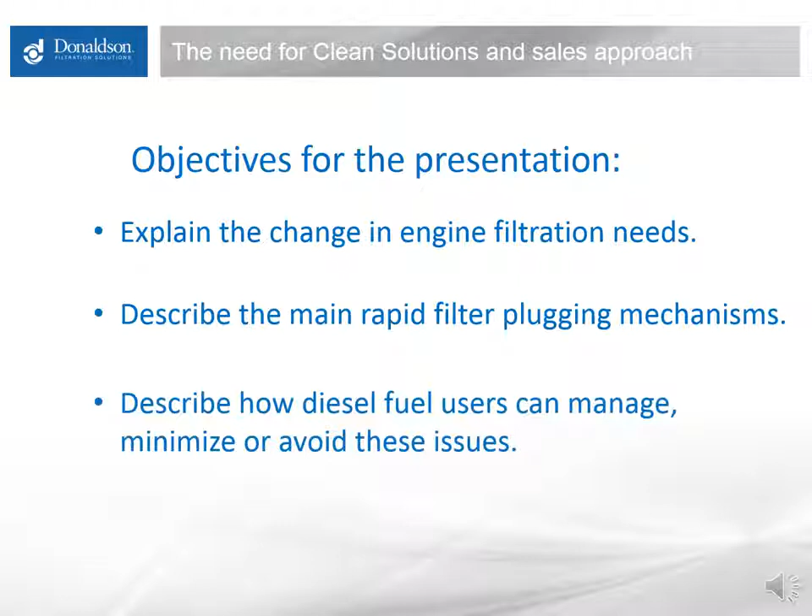The crux of the issue with rapid filter plugging being more common now than it was in the past has to do with engine technology development, specifically the fuel injection system.

The modern high-pressure common rail injector system, to meet new emissions requirements, has a much different tolerance. You see a schematic here of a fuel injector, with an area highlighted where fuel flow is controlled in the engine and returned back to the fuel tank.

There's a segment in there that has a valve under extreme pressure on one side, about 25 to 45,000 psi, and that valve controls fuel that either gets injected into the cylinder or returned back to tank. There's an excess of pressurized fuel to ensure a proper dose of fuel goes into the cylinder each time this injector opens up, and typically on a new engine it's opening about 5 times per cycle.

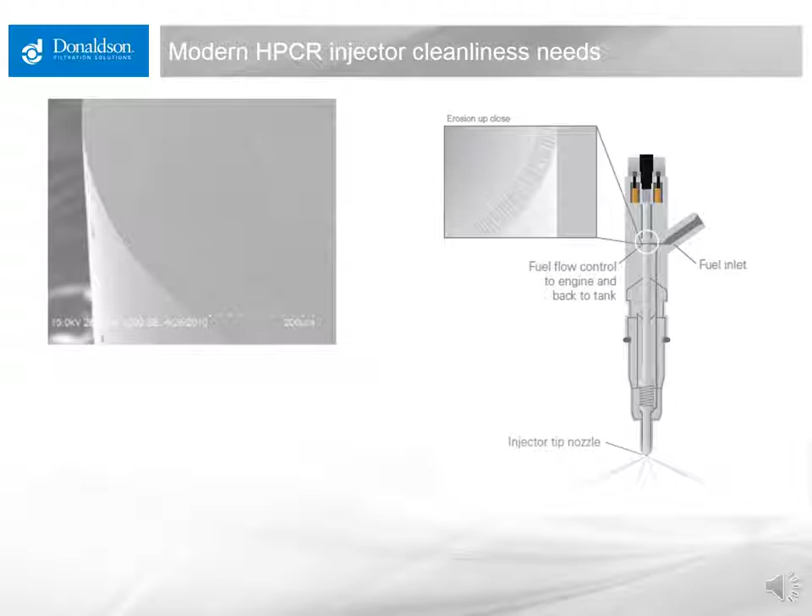So there's a lot of activity going on there, and that valve opens and closes very quickly, only very slightly. In an open position, there's a 2 to 3 micron clearance between the two surfaces of the valve. If any particulate gets between the two surfaces of that valve when it's opening and closing, it begins to impact the seal surface and causes dimpling and eventually erosion.

Off to the left here you can see an as-new surface of that valve, and a valve that has seen impacts from very, very fine particulate, with erosion developed across there, causing leakage across that valve. If flow leakage through that valve increases up roughly 1.5%, the injector will need to be serviced or replaced at great cost in a modern engine.

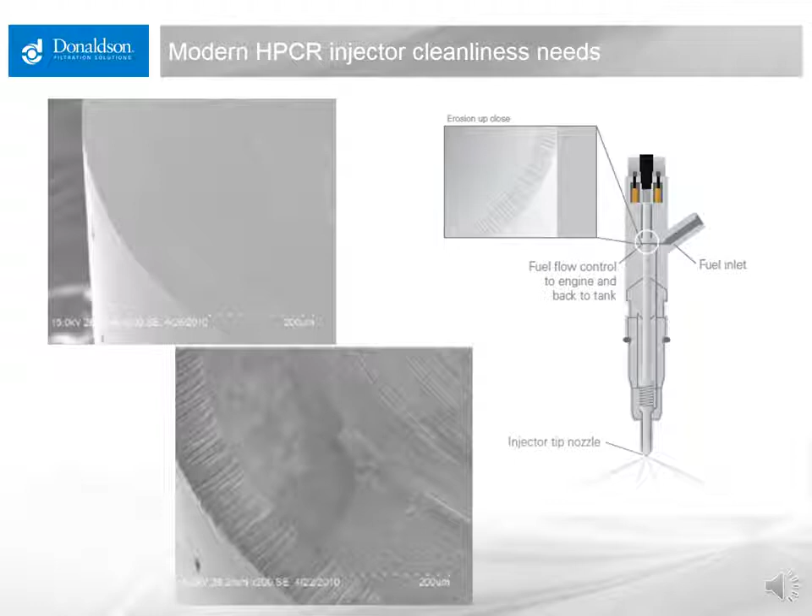So to get a better idea of what it means to go from a tolerance of particulate 7 to 10 microns and larger, to now something about 2 to 3 microns and larger, I have depicted here a range of particles, a representation of particles in fuel.

Fuel tends to carry very small particles. Anything visible will quickly settle to the bottom of a fuel sample or the bottom of a tank. It tends to carry a lot of very fine particles because it's thin and the large stuff settles out. The largest particles, or the smallest particles you can see, are 40 microns and larger. So we're discussing particles much smaller than you can see with the eye. Unless they're at a very high concentration in the fuel, you won't see any difference, whether it's as dirty as it can be or very, very clean. It will look almost identical.

So here I have depicted a representation of the distribution of about 1,000 particles in fuel. There are just a couple of 14 micron and larger particles out of that 1,000. There's maybe 20 or so in the range of 6 to 14 microns and larger. There's about another 30 or so in the 4 to 6 micron and larger size range, totaling about 50 of the 1,000 particles that are 4 microns and larger.

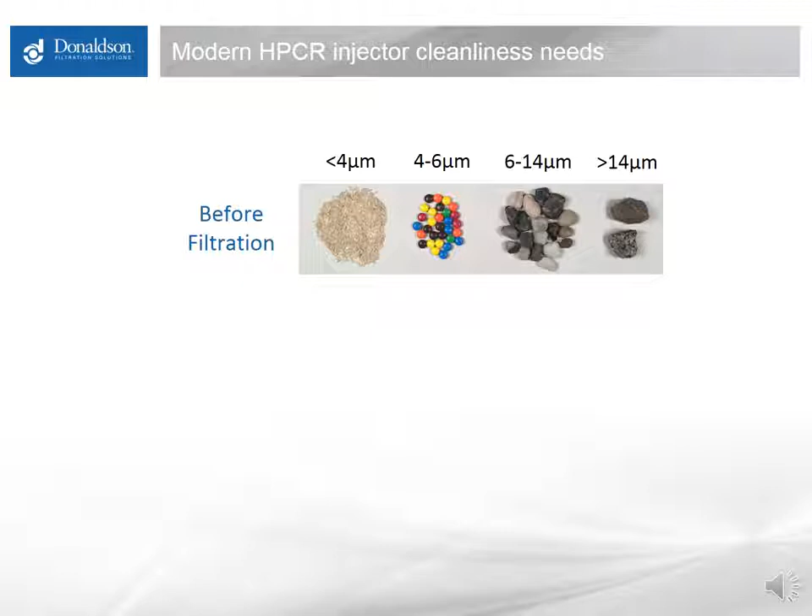That means 950 of the particles are below that 4 micron size, in that 2 to 3 micron size range. So if you have an older dispenser filter or an older primary filter on an engine, it's doing a little bit of filtration, but it really isn't doing much.

It's removing a couple of large particles here and there and maybe a few of the 6 to 14 micron particles, but doing very little else to the vast majority of the particles in the fuel. Those filters tend to last a very long time. Never see them plugging up. You'll see those kind of filters on dispensers and they will last for years and years and never load up because they really aren't removing much in the way of particulate.

An older secondary filter, or maybe an older higher efficiency dispenser filter, was perhaps a 10 micron nominal filter, and that does a little bit better job. It's removing the 14 micron and larger particles, two-thirds of the 6 to 14 micron particles, maybe half of the 4 to 6 micron particles, and maybe it's starting to grab some of those 4 micron and smaller particles, but not very many. Those filters also tend to last a long time, but they do plug a little bit quicker than a 25.

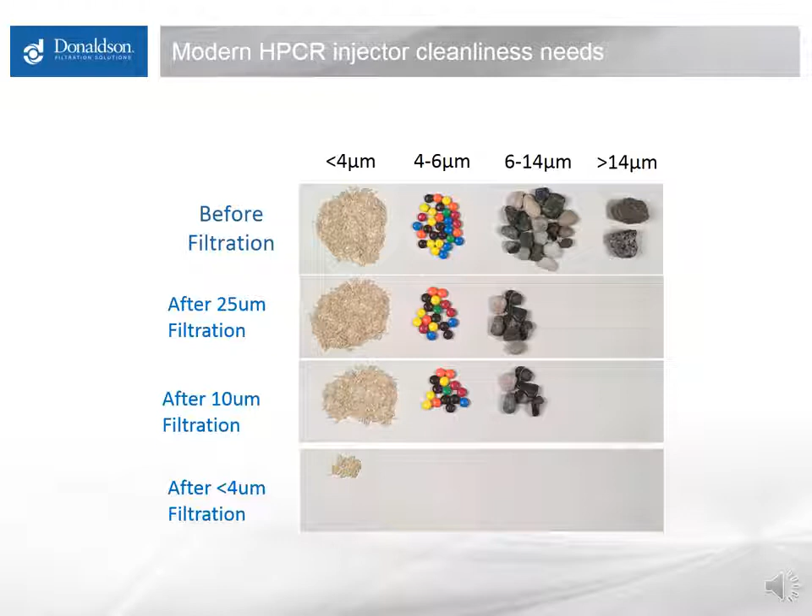Then we come to the needs of the new modern high pressure common rail engine, and the change in requirement of filtration is dramatic. You need to address almost all of those sub 4 micron particles because they are the ones that can do the damage in that modern high pressure common rail injection system. So the job got much bigger. Instead of removing 50 or so of the particles out of 1,000 in a normal fuel supply with an older filter system, you need to remove almost all of those 1,000 particles to maintain proper operation of an injection system. So that change on the filter can from a 10 micron to a less than 4 micron may not seem like much, but that's a huge change in the job a filter must do.

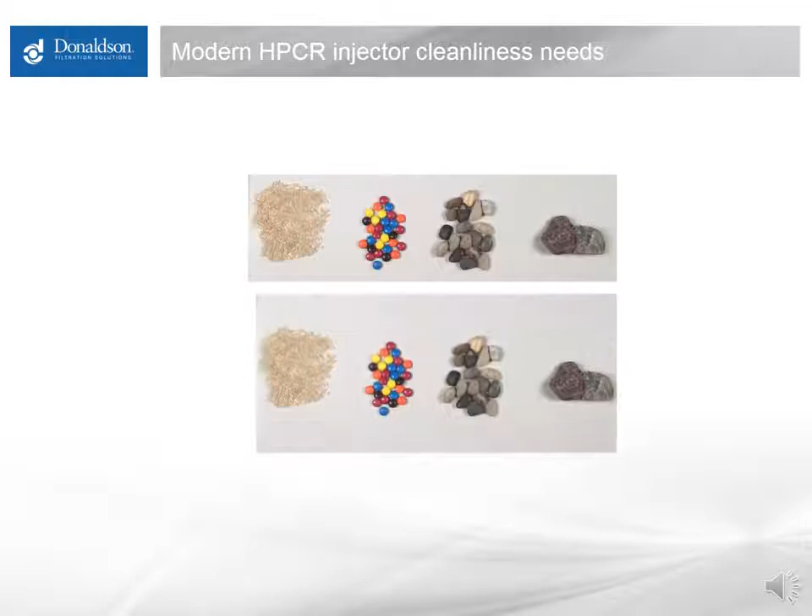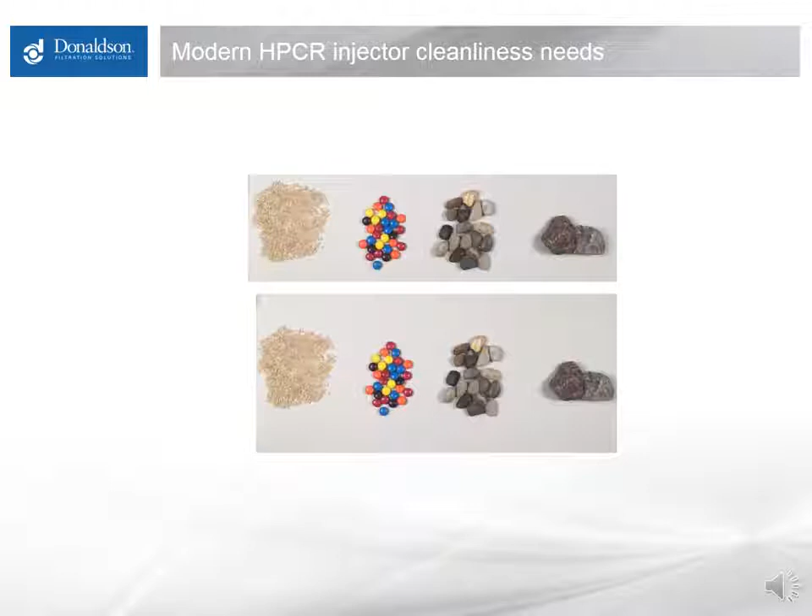Another thing to consider is how much dirt is coming to the filter and what does it look like. If you get a batch of fuel that has a batch of particles in it, represented here by this depiction of 1,000 particles, and you get another load of fuel with its own load of particulate, that's fine. But if you experience a rapid plugging, say you changed your filter and 8 hours later it's plugged, or things were going along fine and all of a sudden the equipment stops very quickly, it's not an increase in more of the same distribution of dirt.

Almost always, it's a massive increase in sub 4 micron particulate, and generally these are associated with chemistry issues or a temperature related issue causing a huge increase in that very small particulate. The rest of the particle distribution is still about the same, but you have this enormous change in small particles, which will plug a modern filter, but they don't really bother an older or coarser filter, so they aren't removed there.

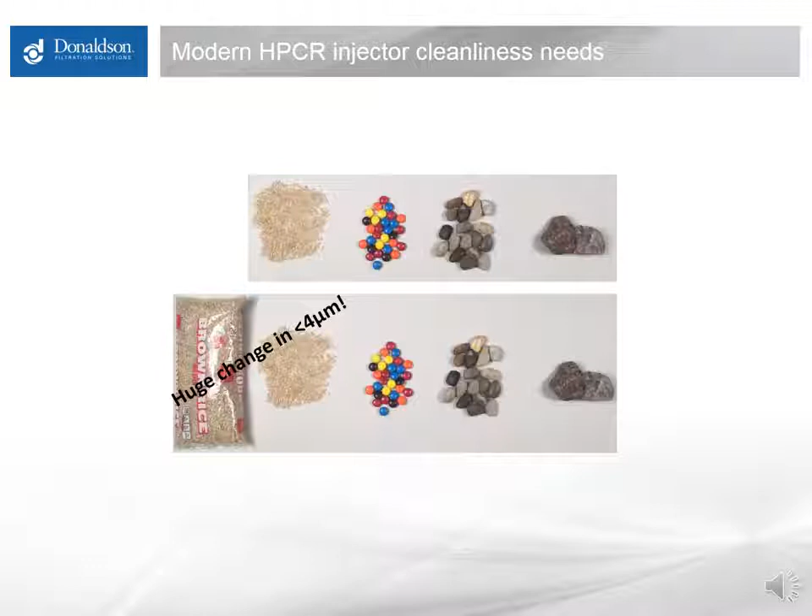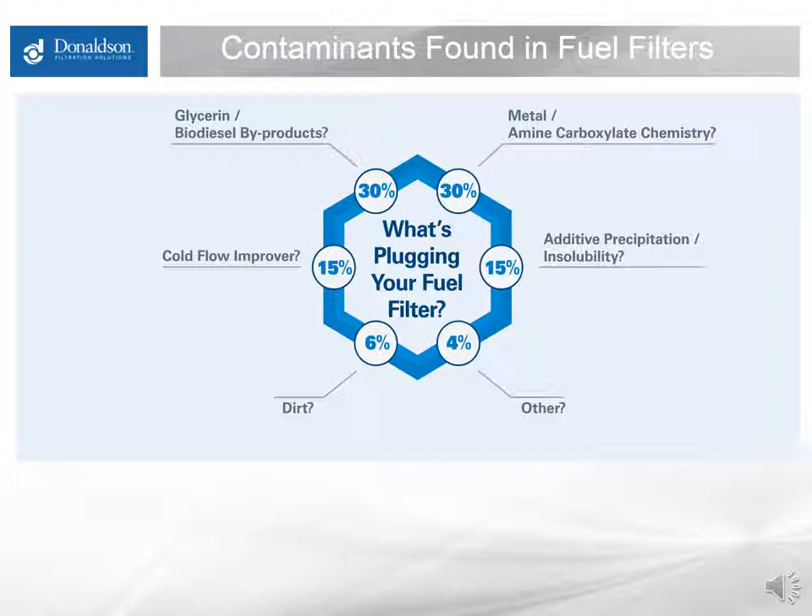First, I'd like to touch on one other aspect of fuel particulate that is actually defined in the specifications. The only true description of fuel generating solids in the fuel standards is in regards to gelling or waxing of fuel. That has to do with the temperature and the safe operability of the fuel staying liquid at a temperature. It's called the cloud point in general. The cloud point is the point at which the fuel begins to form solids that make the fuel look cloudy to the naked eye.

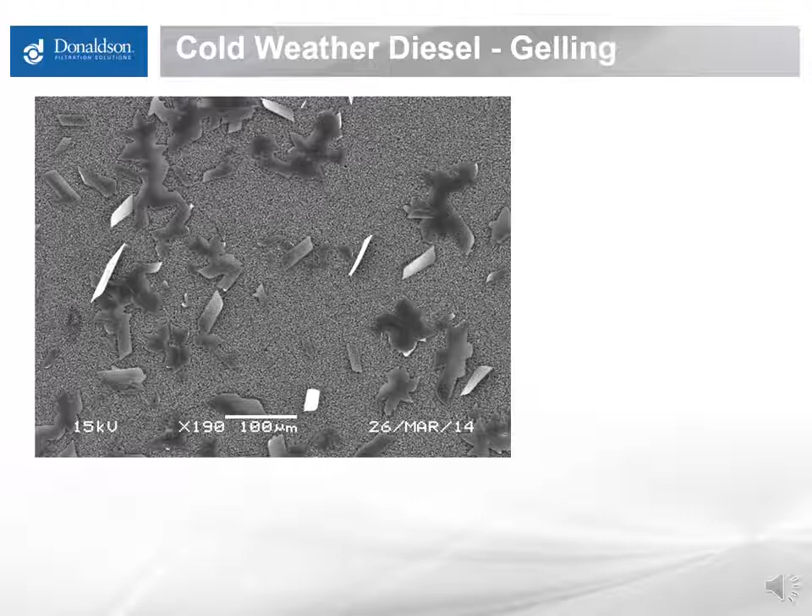A few degrees above that, things are starting to come out of solution, but they haven't grown to a size where they start to be visible. You can see here some wax particulate generated in fuel. Traditional high sulfur fuel in the old days, and straight hydrocarbon fuel, can generate flat sheets of wax similar to these, roughly 100 microns in size, and they will load on filters very quickly. A large portion of the fuel compared to the amount of actual dirt in the system will turn into solids due to gelling, and it will overload the filters and plug things very quickly.

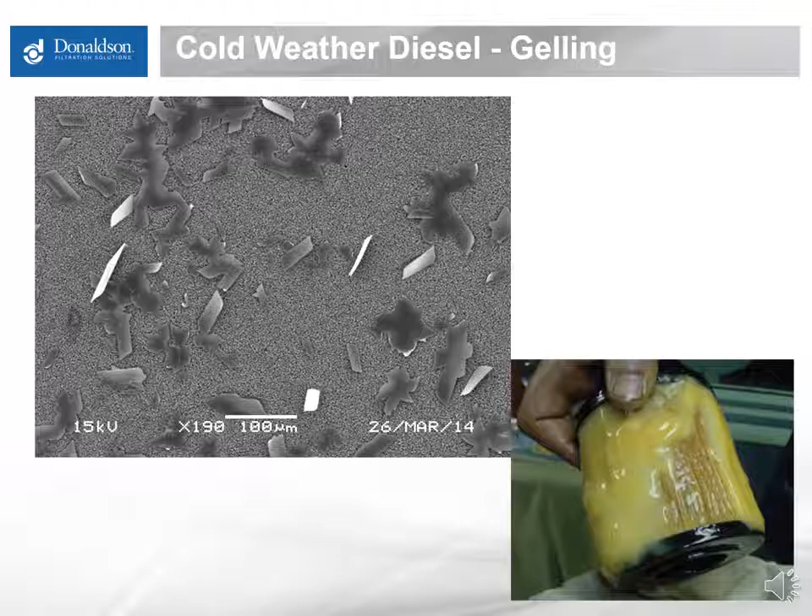If you run that fuel or keep that fuel at a temperature above its cloud point, that should be a very minimal issue, but it is a critical parameter to keep in mind when purchasing or using fuel. Know what temperature the fuel will stay liquid at, and make sure your minimum expected operating temperature is above the cloud point by at least several degrees, or you're likely to run into this issue in cold conditions at times.

The first solids formation that isn't really described in standards, which causes probably the most frequent unexpected filter plugging issues seen in the field, has to do with the use of biodiesel blends and what we refer to as glycerin fallout. Glycerin is a trace contaminant left in the biodiesel when it is manufactured. Most of it is scrubbed out, but there are a couple hundred ppm of glycerin in there, compared to actual dirt which is at about 1 ppm concentration. Even when you blend this biodiesel at different percentages, 5, 10, or 20%, there's still enough glycerin in there that in certain conditions, some of it can fall out and make particulate.

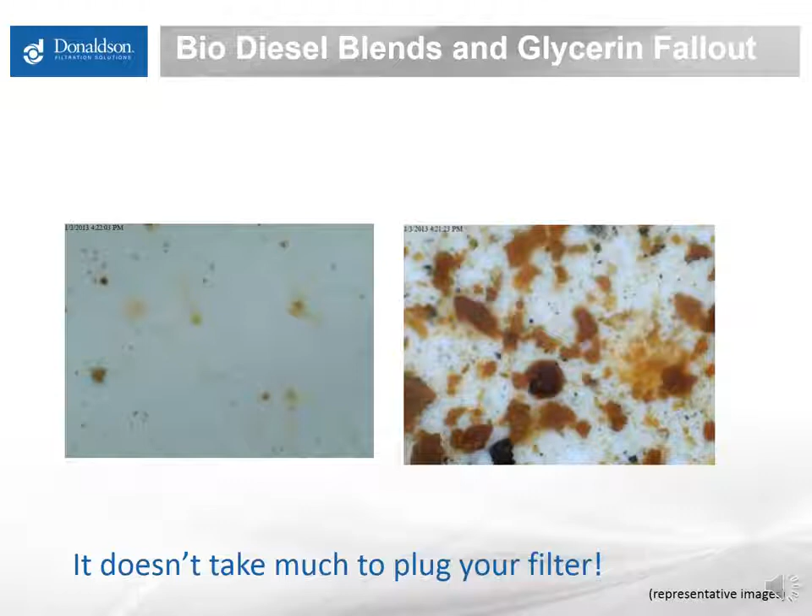As I mentioned, it's usually in the fuel at a concentration much higher than the actual dirt. The conditions that lead to it coming out of solution are decreasing temperature and an increase in moisture content in the fuel, which will lead to dropout and formation of solids that can plug filters.

Certainly don't expect to see cases this severe, but they do occur occasionally. Solutions for this are to keep the fuel as warm as you can, and keep moisture out of it. The 2 things fighting against you are cooling conditions and water. So keep your tanks clean, and if at all possible, only use biodiesel in warmer conditions to avoid the temperature issue and dropping out of solids.

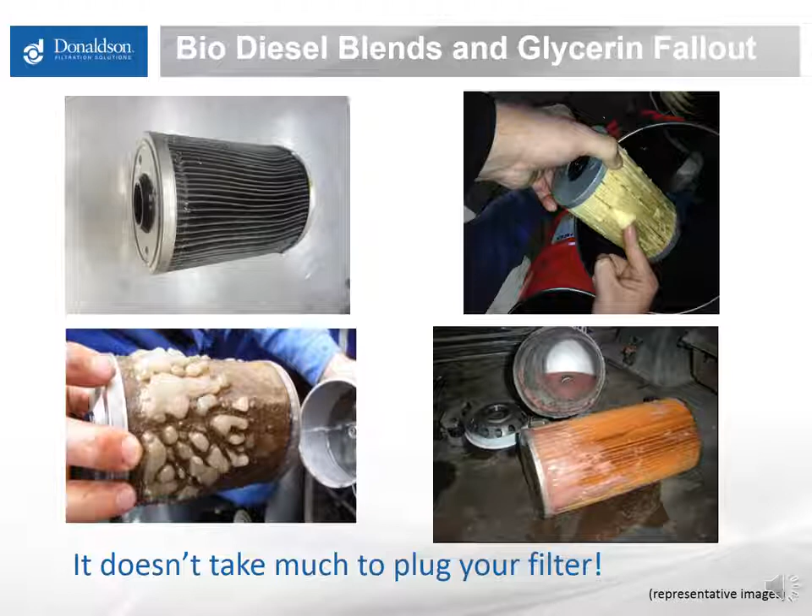That may be the case in certain parts of the country. In northern North America and Canada, biodiesel is not used, but there are states that mandate its use year-round, and there's more frequent use of biodiesel in the southern part of the United States year-round as well. So if a cold snap comes through, you can have conditions likely to cause glycerin plugging. This is probably the most frequent method of filter plugging encountered in the field.

The next most common issue we see in the field is something called metal carboxylates. They're a long-known contaminant in fuel, traditionally contributing to injector deposits in older series engines with coarser filters. Very fine particulate passes through older filters and continues downstream, but with a modern high-pressure common rail engine, secondary filter, or high-efficiency bulk filter, it will load in that filter.

These are not typically generated at end customer sites. This material can be found well upstream, all the way to the refinery, and the likely contributors to its formation are present in the final steps of finishing fuel there. It needs water to be present, some salt present, and the carboxylate portion is a common chemistry put in fuel as a corrosion inhibitor. So you have corrosion inhibitor, salt from the final salt bed filtration to remove water, and some caustic usually used late in fuel manufacture. All of those contribute to carboxylate formation.

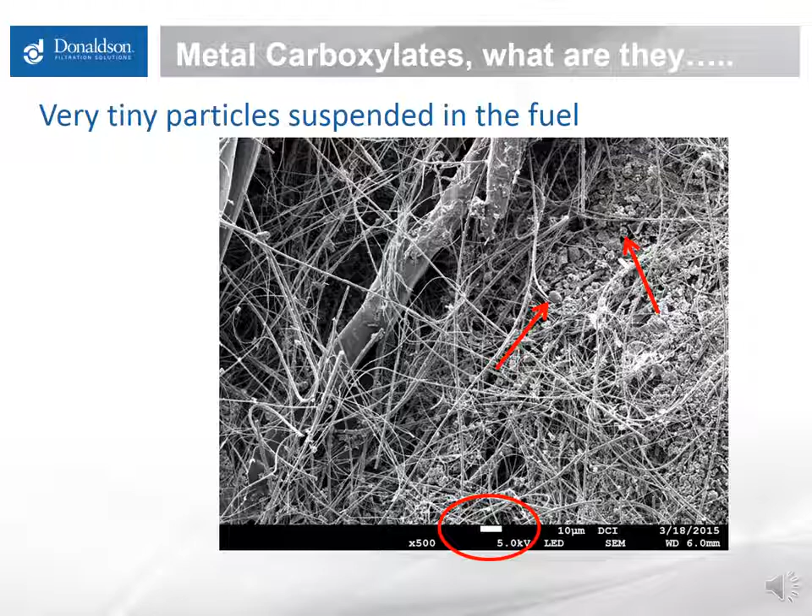A somewhat related chemistry issue that may be confused in certain analysis with metal carboxylates is something called amine carboxylates. This reaction occurs from the same corrosion inhibitor typical in fuel, there to prevent damage to pipes and pumps, but it's a reaction between that corrosion inhibitor, water, and some amine chemistry common in cold flow improver packages, specifically premium cold flow improver packages. That can form a whole bunch of small solids that will load in filters.

This is associated with cold flow improver materials used only seasonally, so it's occurring generally further downstream - not coming from the refinery. Cold flow improver is usually blended either when the tanker truck is being filled up for delivery, or potentially at the end customer site. If this reaction is occurring, a way to avoid it is to stop using the cold flow improver and perhaps blend some more number 1 to lower your cloud point naturally, at least to experiment and see if this is the cause of unexpected rapid plugging. Again, this is a seasonal one - you can't address it on fuel coming to you unless you're pre-filtering, and it may be created at the end customer site.

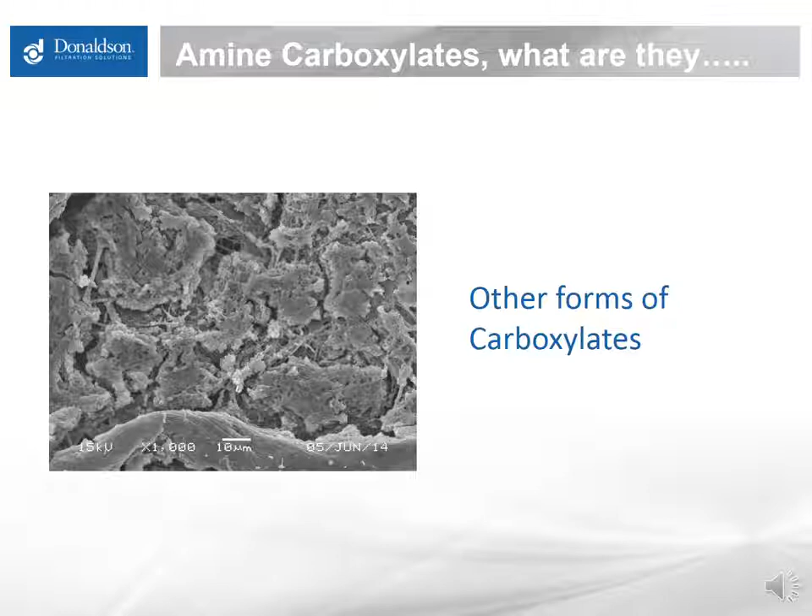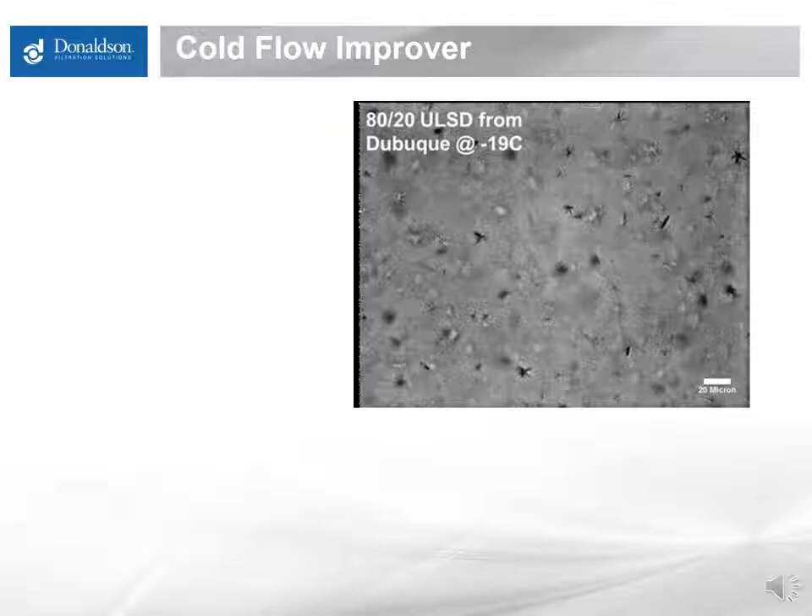The cold flow improver changes the shape of particulate formation. It does not change the temperature at which the fuel begins to generate particulate, or the amount of particulate it generates. It generates a different size particulate. In this case, there's a 20 micron scale bar on that image, and you can see these are less than 20 micron particles, which will help the fuel flow through screens and pump down pipes.

But it's still going to load on most filters used in primary and secondary positions, or even relatively efficient bulk dispensing filters. It's still forming a solid, just a different shape and size, and it's likely to overwhelm filters and plug them quickly. The most robust solution is to blend more number 1 diesel fuel, naturally lowering the cloud point so that when operating in cold conditions, the fuel remains entirely liquid.

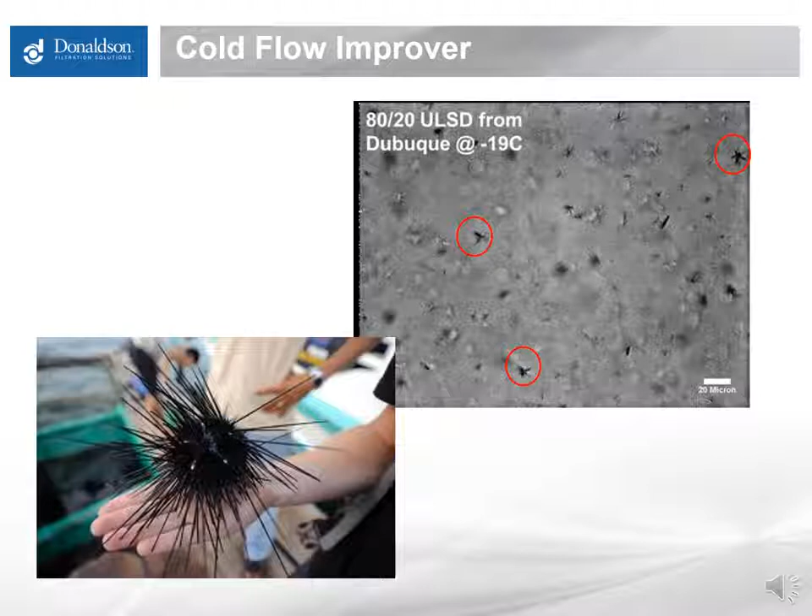One additional point—and there's a webinar on this, as with all these topics, we have more extensive detailed webinars. Cold flow improver dosed in at the end use point can lead to additional particulate formation above the natural cloud point of the fuel. If fuel already has cold flow improver in it and you add more, it begins forming particulate at a higher and higher temperature. So always follow the dosing instructions, and be certain whether the fuel you're dosing already contains cold flow improver.

It's also worth noting that cold flow improver must be put in warm fuel. It cannot be put in fuel that's below about 55 degrees Fahrenheit—it needs to be blended warm to function properly. There are some hazards associated with that, and you must read the instructions to prevent further plugging instead of solving the problem.

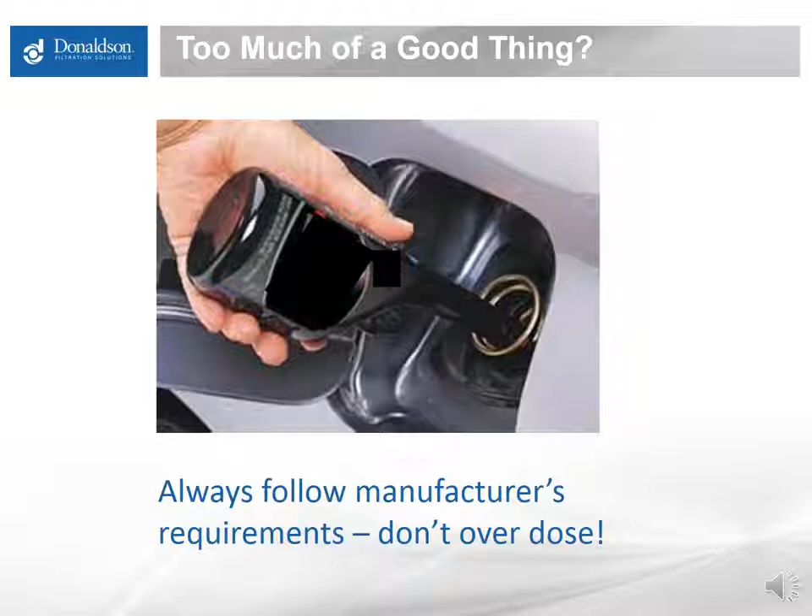I've touched a couple of times on how water contributes to solids formation, both with glycerin and some of the other additive reactions that create solids. So we don't recommend letting water build up—you should do your best to prevent that, and there are things you can do: routine tank cleaning, using desiccant breathers, or even purging the reservoir headspace with dry air to prevent condensation from building up. We have a couple of webinars on that on our website, My Clean Diesel, if you have concerns.

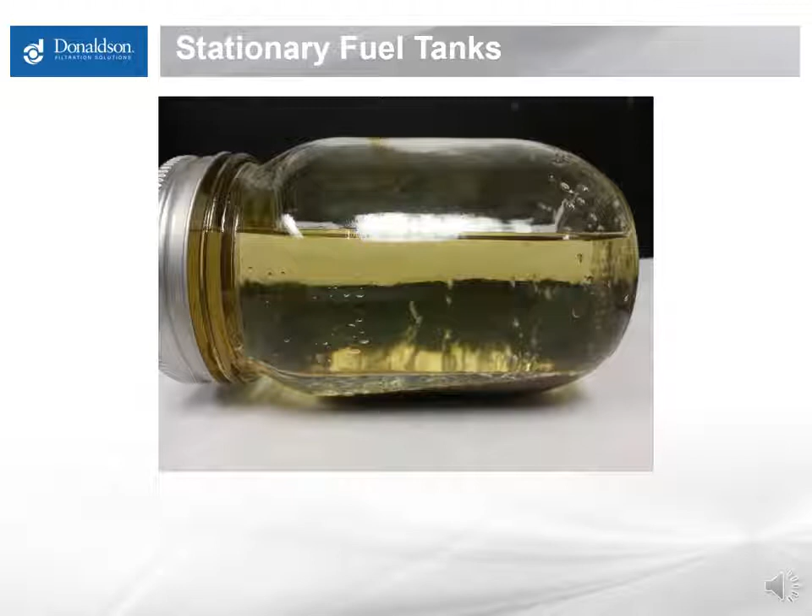And then dirt, which can build up in the bottom of the tank, should also be kept at a minimum to avoid certain issues. Again, gravity is doing its job settling things out over time, but if you dispense new fuel into that tank and stir things up—or worse, move the tank around...

If this is a mobile fueling trailer, a pickup bed tank, or a mobile vehicle, and you're not keeping that tank very clean and dry, as you bump it around you stir things up. It's possible with a mobile fueling system to dispense far poorer quality fuel out of the nozzle than what you put into the system, because as you take it down the trail, road, or across the job site, you agitate it, shake it up into a milkshake, and dispense it into a piece of equipment.

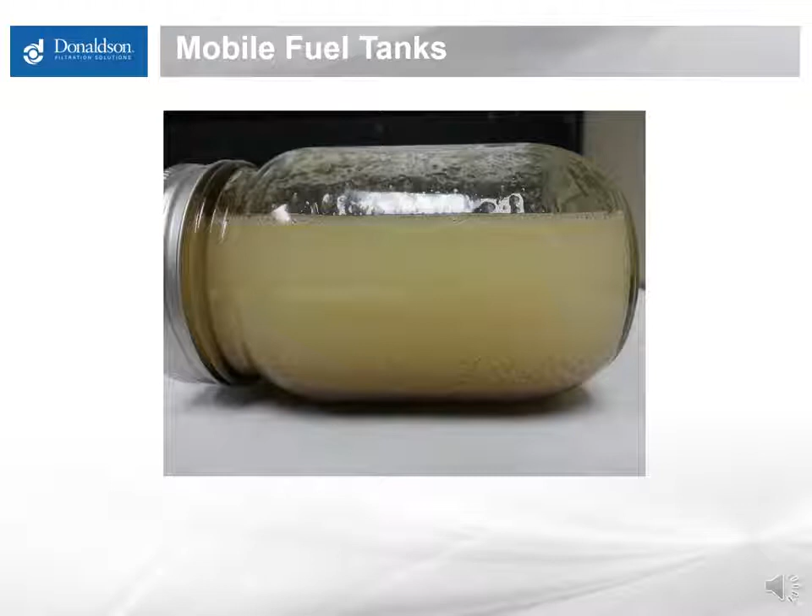That needs to be considered. The equipment needs to be kept very clean, or you're likely to dispense high concentrations of dirt and get rapid plugging as a result. It's just not a good situation to move dirty fuel around—you'll stir it up and create very unhappy situations with soft solids and hard particles causing a lot of grief.

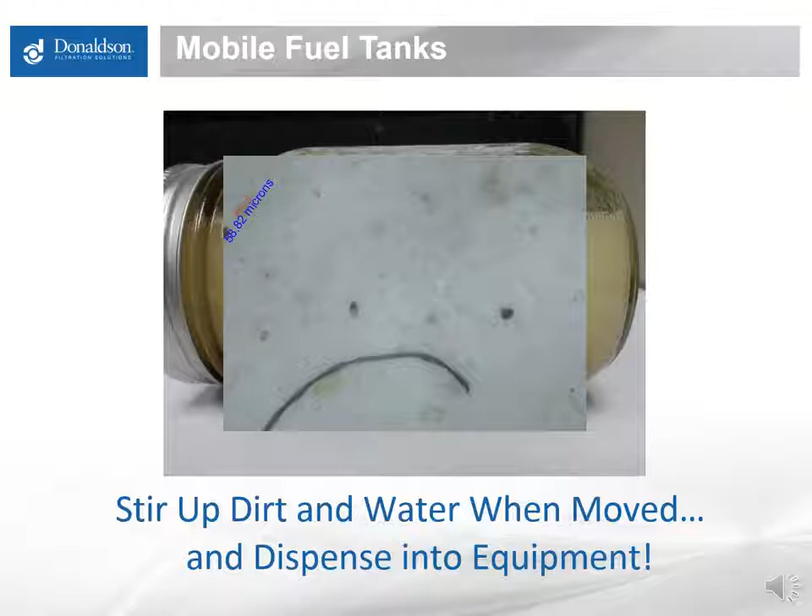Lastly, a couple of somewhat unusual but occasionally occurring things are salts. I mentioned salts are used in the refining process. They are a drying agent used in the refinery. It's just a large bed of granular salt that will absorb moisture out of the fuel to get the fuel's water level low enough to meet specification, or below it, leaving the refinery.

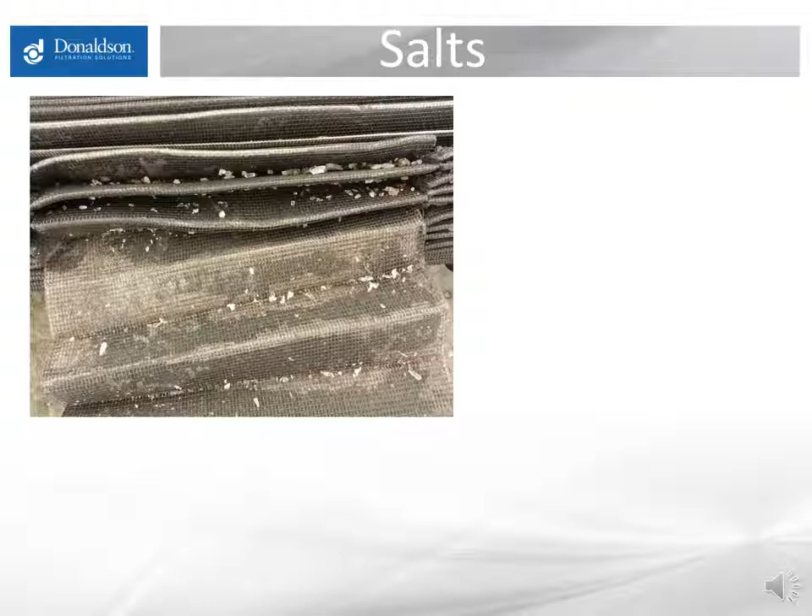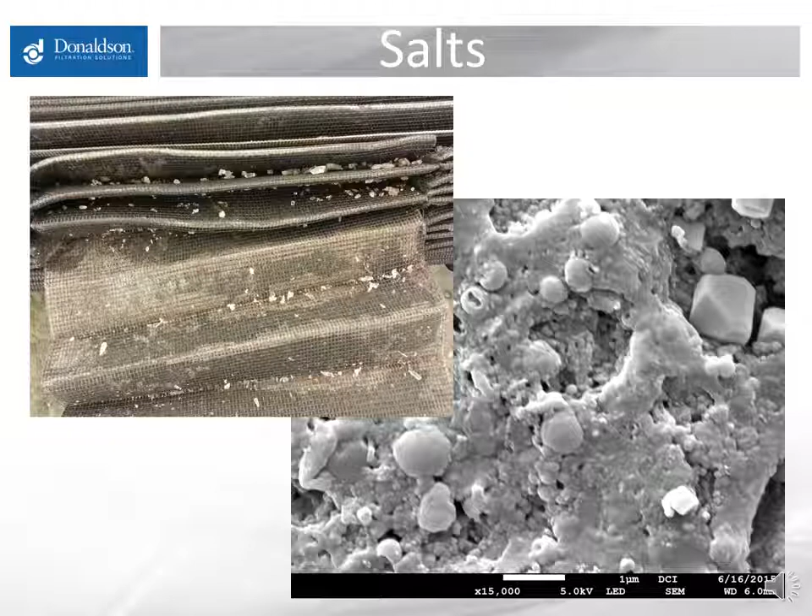Obviously one is big chunks of salt, and the other is a very low concentration that was collecting over time in a system. But there's not much you can do other than bulk filter and try to prevent that stuff from coming on board in the first place. It too is a transitional issue - it shows up as a severe issue, and then it will go away because the system has been repaired.

Finally, one last material to consider is something called pipeline drag reducer. Seasonally, pipeline drag reducer is used to increase the throughput in distribution down pipelines by as much as 20%. This material in raw form is sort of a fish slime material, and occasionally you will see it show up in fuel that's on the downstream end of a pipeline, and it has not done what it's supposed to do, which is shear in and turn into become part of the liquid.

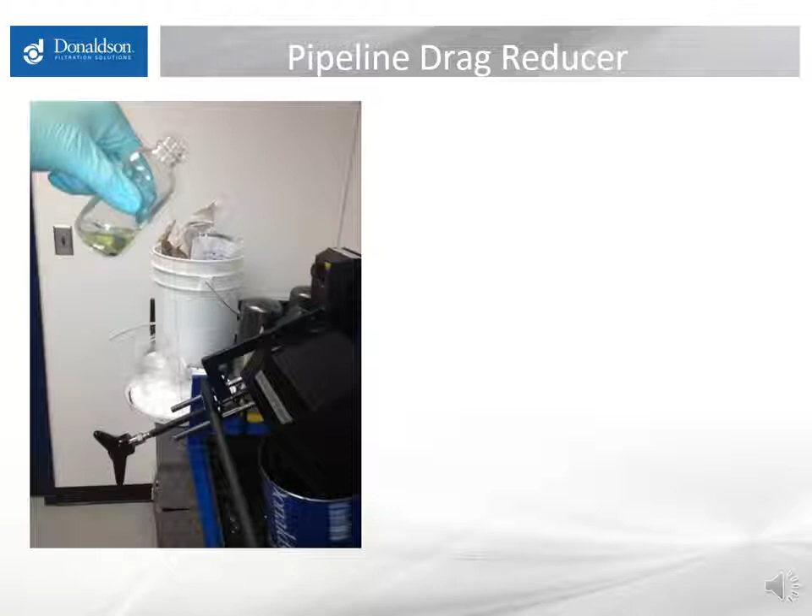You just want to be pre-filtering your fuel at times to catch this kind of thing before it impacts your on-equipment operation. It's not a nice thing to deal with. It can come through filtration at warm temperatures, and in cold conditions drop out as particulate and lead to plugging, say on the outlet side of a bulk tank that sat through winter, or in a piece of equipment that sat over winter in seasonal use conditions. We do see that on occasion. One change of filters or the usage of that fuel, and you'll go back to normal conditions. It's not something necessarily that can be caught on delivery if that fuel is delivered warm.